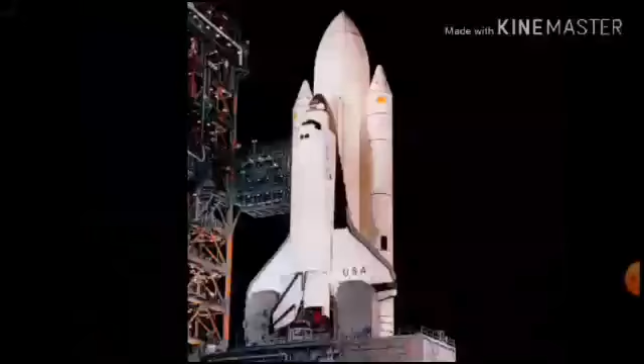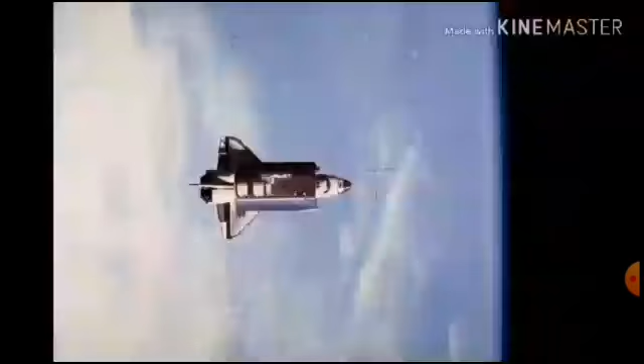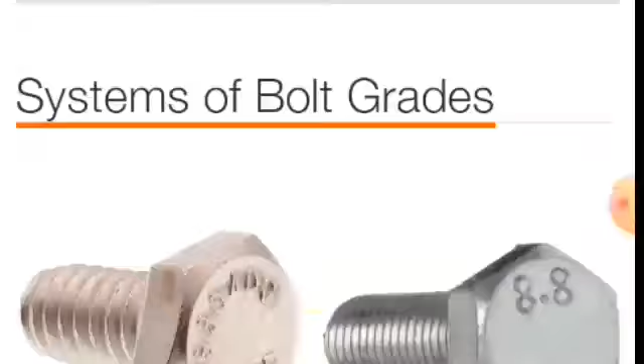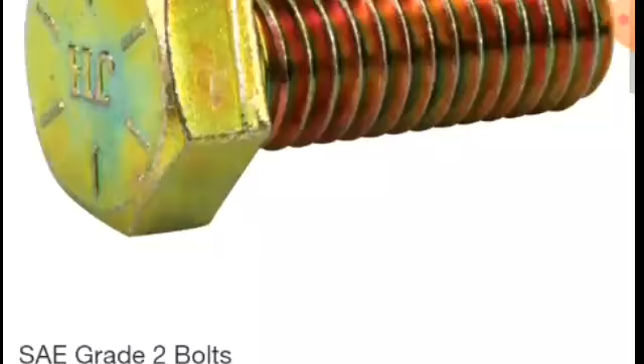I was pretty amazed when I came across the Home Depot website, and they have a link toward the bottom called grades of bolts, and it's pretty interesting. If you're a contractor, it shows you a little bit about the bolt grades and the markings on the bolts. And this is the part I found most interesting, they have the proof loads. I wanted to start my discussion right here.

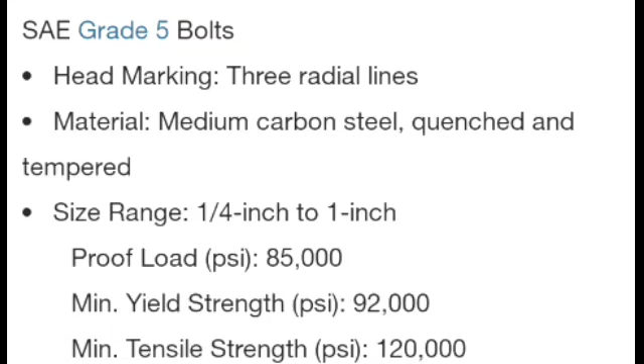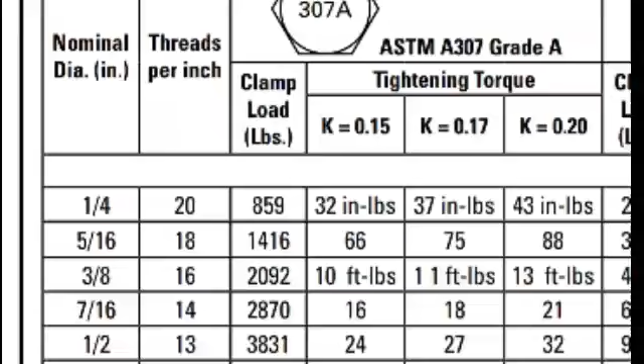The problem is that even though in this little Fastenal table on the right side I chopped it off, it does have a clamp load column. Of course you can look over there and cheat, but you really don't understand where those values came from.

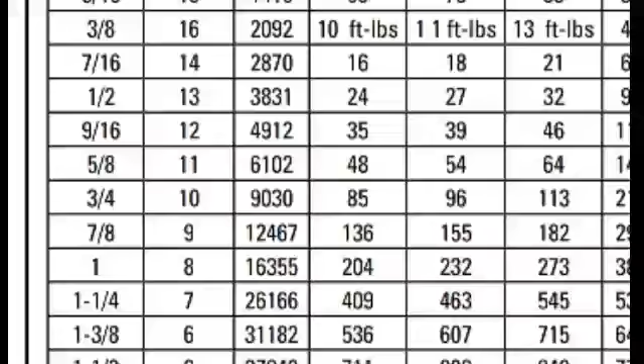Likewise, you look at this table from Spanner Corporation, and it's a very nice table. I've used this for years and years, but wouldn't you rather understand where the values come from, especially if you had to testify in court about your calculations? You'd want to know exactly where the numbers are all coming from. You can't just tell the jury, well, I took it off the Spanner table. The jury just isn't going to go for that.

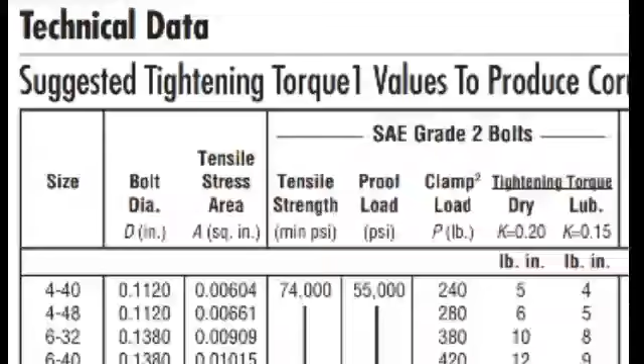So let's take a look at how it's really done. What I've done here is I've zoomed in a little bit on the Spanner table, but you really should be looking at the manufacturer's recommendations for the bolts. So let's just go with this. It says 55,000 PSI, just like it does on the Home Depot website.

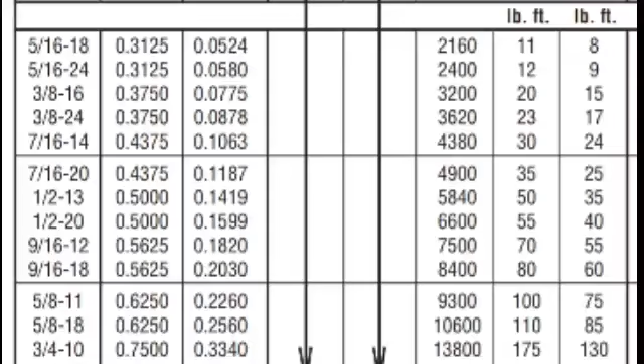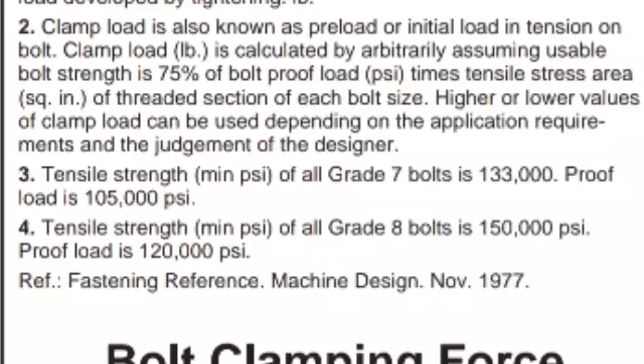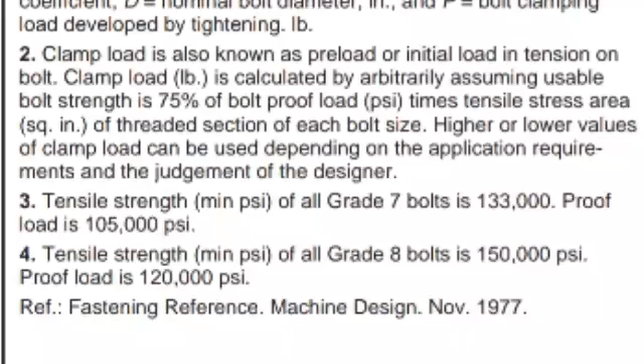Keep one thing in mind, just because it's on a website does not mean it's accurate. As an engineer, you need to investigate. Just because Spanner has copied Fastenal and Home Depot has copied Spanner doesn't mean that the data is accurate. What you really should be doing is going back to the manufacturer's recommendations and finding out what they actually saw in their test report when they did the pull test.

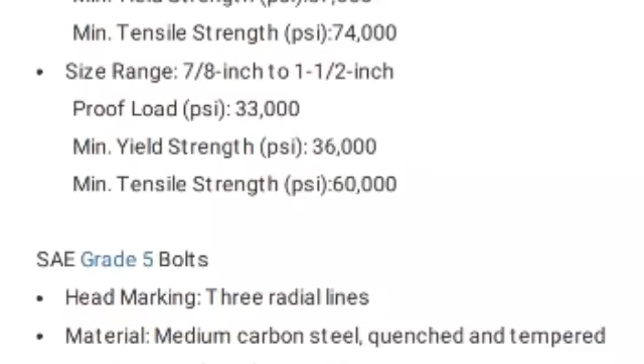Okay, so we're not going to beat a dead horse, but let's go with the data. So 55,000 PSI is the proof strength for these grade 2 bolts, which are the same as grade 0, grade 1, grade 2, or ASTM A307. It's all the same.

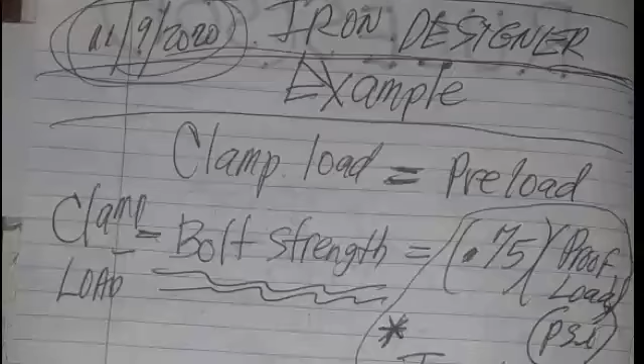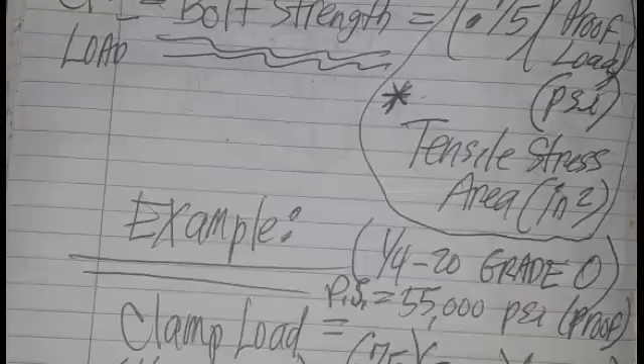Now, here at Iron Designer, when we want to understand the bolt strength, we take 0.75 times the proof load in PSI times the tensile stress area in square inches. That is going to give us the preload or the clamp load.

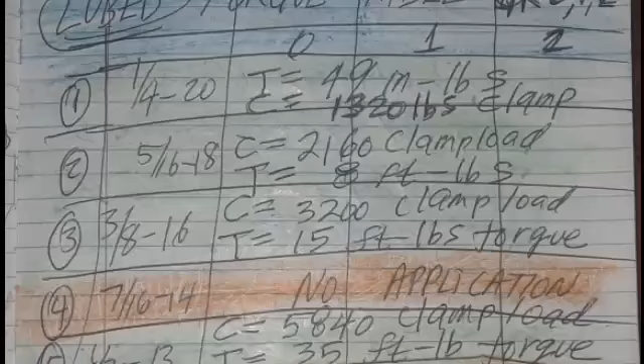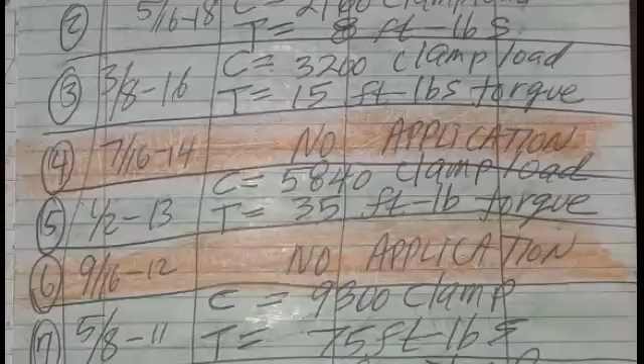Now, all I've done here is just create a table of the preferred bolts that we use at Iron Designer. 1/4 20, 5/16 18, 3/8 16. We skip over 7/16, go to 1/2 13. We skip over 9/16, go to 5/8 11, 3/4 10. We skip over 7/8, and then we finish up with the 1-inch bolt.

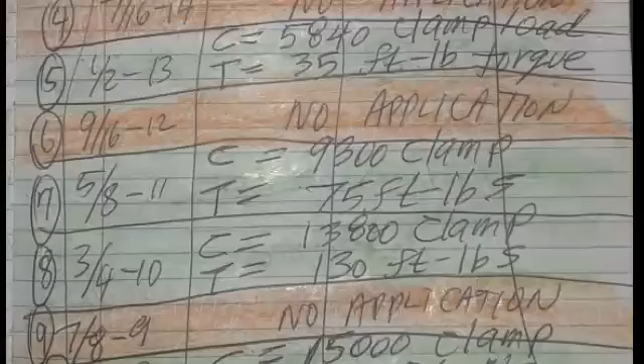Now, the reason why we do that is mainly to conserve our inventory and reduce the number of tools that we need for assembly.

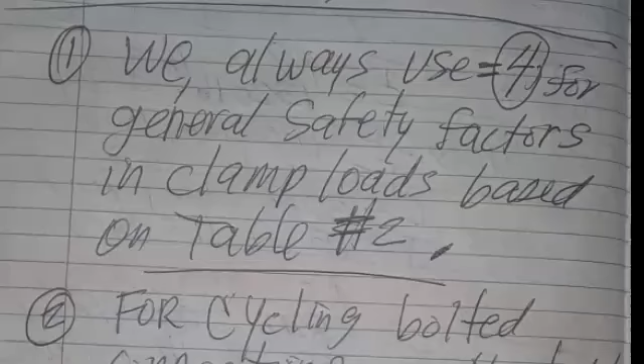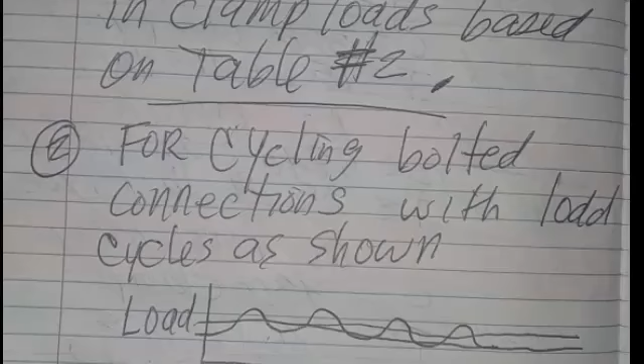Now the next thing that we do is we always establish a baseline safety factor, and we like to use 4 for general safety factors. If the connection is cycling or has fatigue or reverse and repeated loading, we'll use a safety factor of 6. We just understand this from years of experience and analysis, it's either 6 for cycling or 4 for static.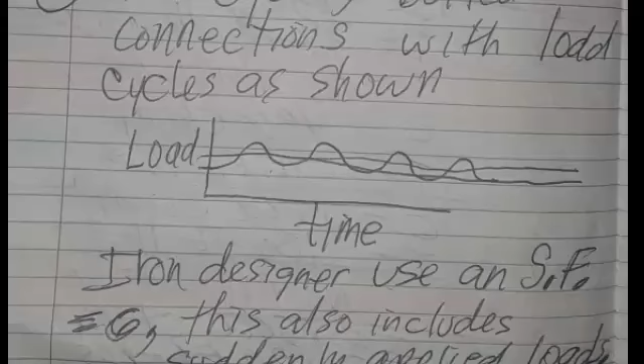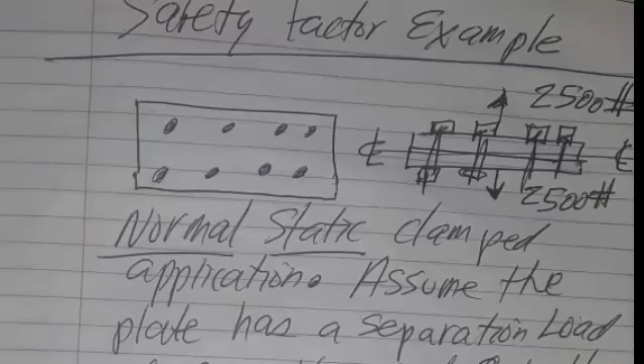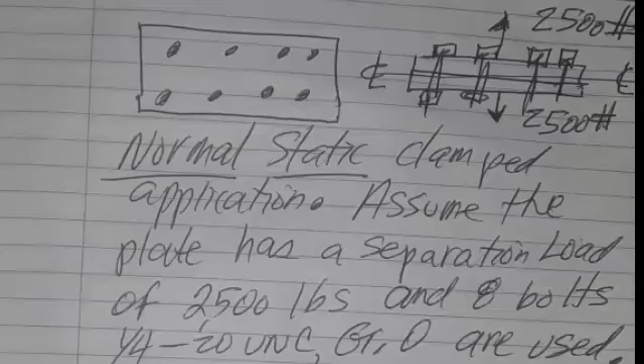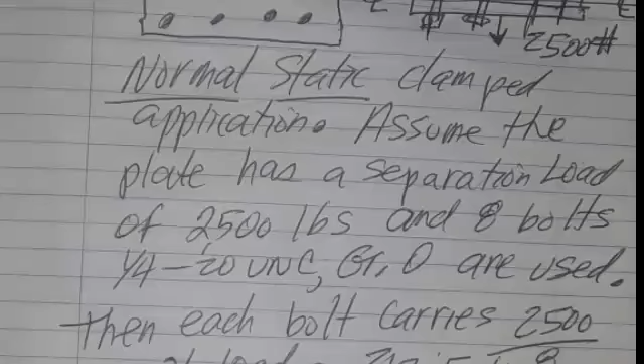Now lastly, we just put it all together. So here's an example. Let's say we're going to use 8 quarter 20 UNC grade 0 bolts, and the total separation load is 2,500 pounds on the 8 bolts, and we're assuming equally loaded bolts. So we take 2,500 divided by 8, and we get an equal load of 312.5 pounds per bolt in axial tension. Now this is where we use the clamp load that we calculated earlier.

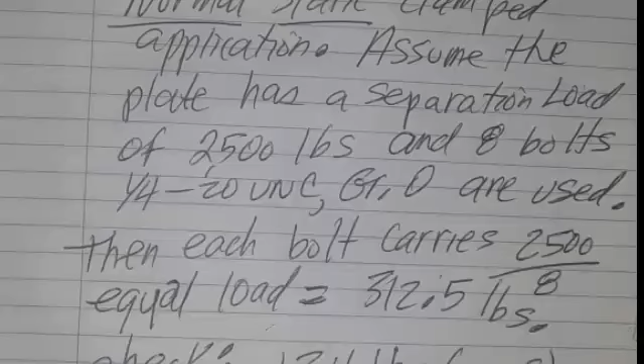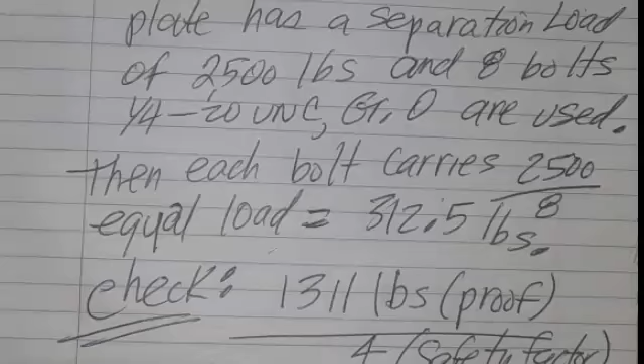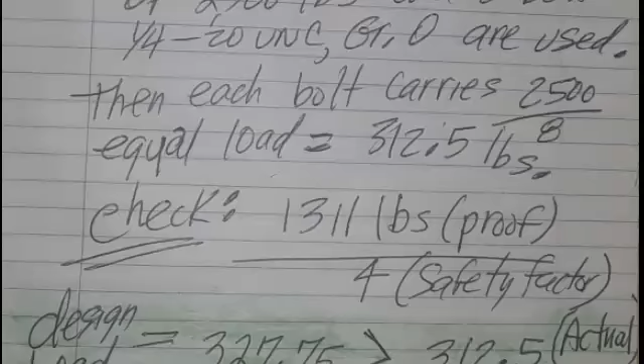That's why you want to do your own clamp load calculations. So in order to check our values, we take our 1,311 pounds proof divided by our number 4 safety factor, and basically we come up with a design load per bolt, or how capable the bolt is. In this case, each bolt is capable of 327.75 pounds force, and that is greater than 312.5, which is the separation load per bolt. So if it's greater than or equal, then we're good to go.

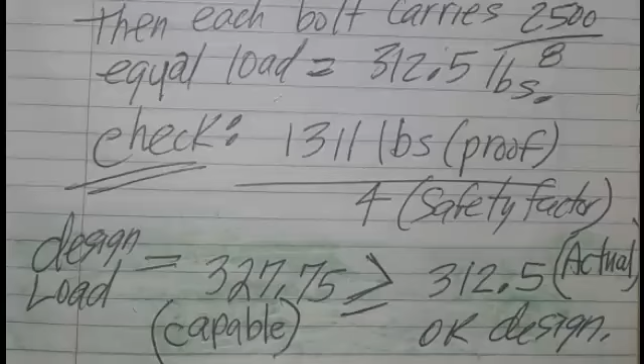I hope this video has helped you to understand how we calculate bolt safety factor at Iron Designer, and I certainly hope you use the same methodology.